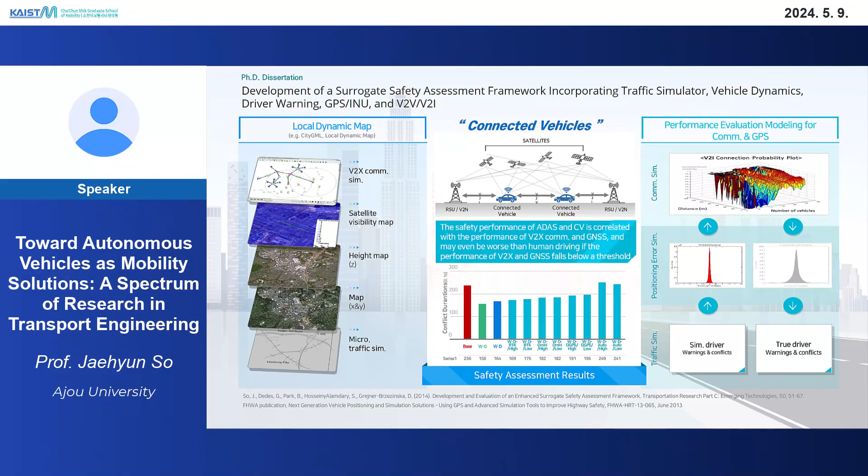But at some point, my research topic is automated vehicles, and another pillar is the smart city thing. It's a pretty different thing, more like urban planning. But there's a reason. During my period at the Korea Transport Institute, most of my job was automated vehicles. But at some point, the Korean government decided let's go for a smart city project. But at the time, is there anyone with a major in smart city engineering in their bachelor's degree? Probably not, right?

So there were no actual experts, no PhDs in smart city engineering. So at the time, they collected some people, and in Korea the main solution and advertisement was automated vehicle, automated bus, automated shuttle. So they collected some people from automated vehicles, and I was one of them. I got an opportunity to design automated shuttle planning and operation, and at some point I was appointed as a planner for mobility services in this area. That's the reason why I entered this area.

At the time, I was challenged because I didn't have any urban planning knowledge. So I had to learn about that, which is super different from automated vehicle technology. But anyway, at some point that was a really great approach, because urban planning for smart city, automated shuttle, that's a pretty different thing.

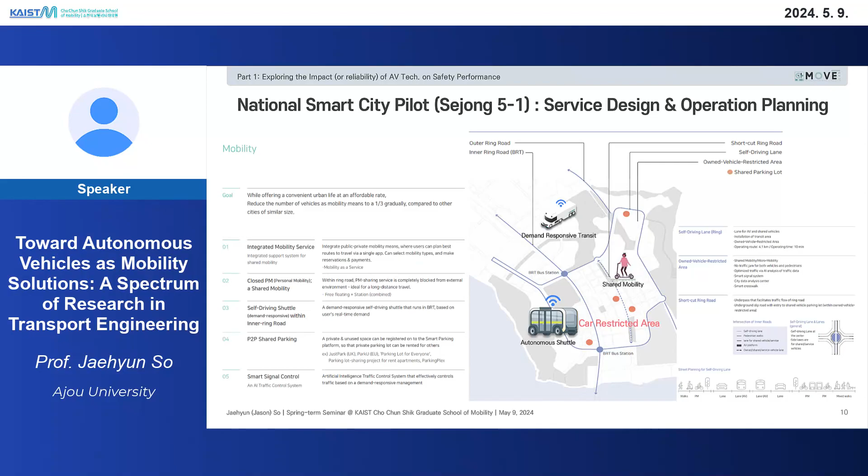So now, my research goal and career, I have to confess I don't think I'm very deep in some specific topic or methodology. Maybe AI? Yeah, I'm using AI. And NLP? I'm using NLP. But I don't think I'm very deep as those kinds of data scientists, and I don't want to be actually. I just want to use it very well. So sometimes I think about how PhDs and professors want to pretend and become like a super expert on a specific topic, right? But I thought my passion in my mind is somewhat different. I'm interested in many areas and many topics.

Sometimes UAM, sometimes automated vehicles, and talking with, let's say, Ruben or others - wow, that's a great idea, let's go for it. That's my instinct. So this kind of decision is like, let's just pursue my passion in my mind, not just pretending I'm a good scholar and a very insightful scholar in some specific topic. Instead, I'm going toward the merit of breadth over depth. Depth is important, and I respect that, but my goal is something like that.

So I'm going to do everything for designing and making efficiency optimization of mobility operations. It's like everything about automated vehicles and mobility operation, but that is my approach. So now I'm doing automated vehicles, a smart city project, and UAM vertiport things. I'm happy with that because having new things and new knowledge is my kind of happiness. So that's my career in my research journey.

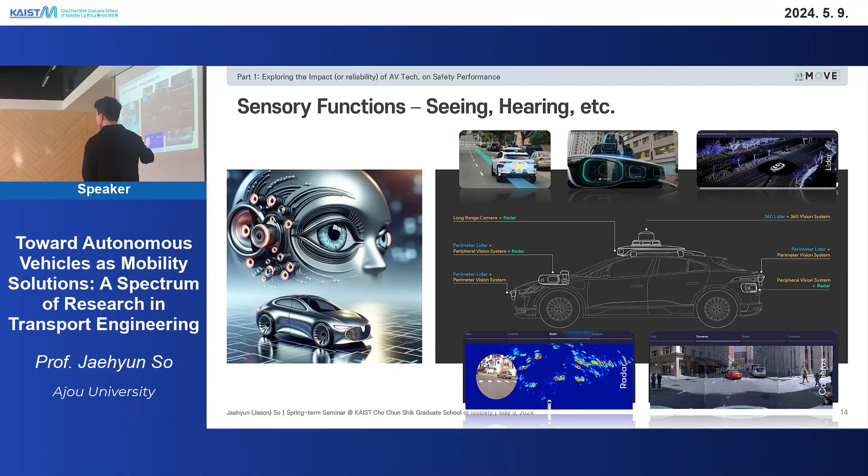So if their eyes and ears are broken, the safety performance is broken. But in transport engineering, I think our problem is we don't think about the ears and eyes having problems, because we don't have the knowledge or the capability. So for those kinds of things, we have to make a naive assumption: that there are no errors on GPS or communication or something like that.

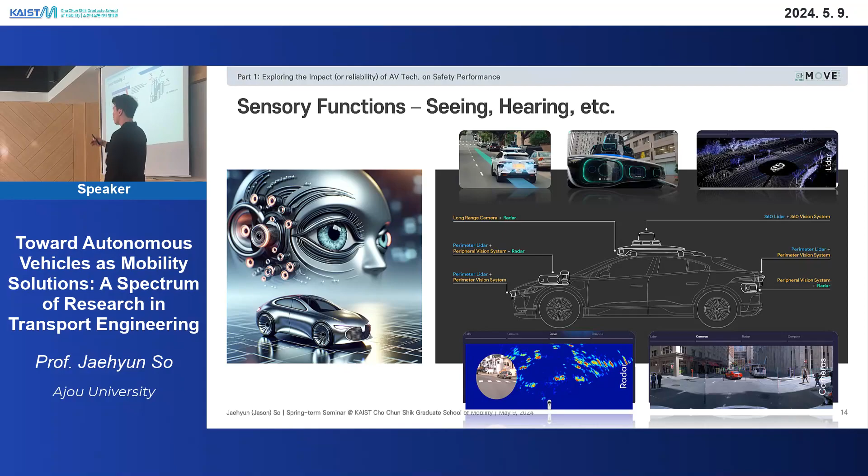But if you see this, there is a lot of GPS technology—GNSS, DGPS, SBAS, PPP, OmniStar. There are actually many positioning systems, but they have different accuracy levels.

But what about in-vehicle? Maybe RTK—K is missing, sorry about that. What about RTK? RTK has centimeter accuracy, so probably having that in a vehicle would be a great idea. But think about it—RTK is like $10,000. Will you have that kind of vehicle with $10,000 of RTK?

And what about GNSS, with 10-meter accuracy? Now you are really in danger, but your system will say, 'hey, you are kind of far distant, 10 meters away, so don't do anything.' You're going to be in danger, right?

So what is actually the optimal technology, and what is its impact on safety performance? That was kind of my research area, my research interest—and at some point there are even GPS errors, especially at the city level.

Have you driven in a very dense area in Seoul City? Then navigation says you are on a different track, or you are kind of out of route, because you are on route, but the system is recognizing your location as somewhat off. So there are many GPS error issues, and they will affect safety performance—they will be really bad for your safety performance.

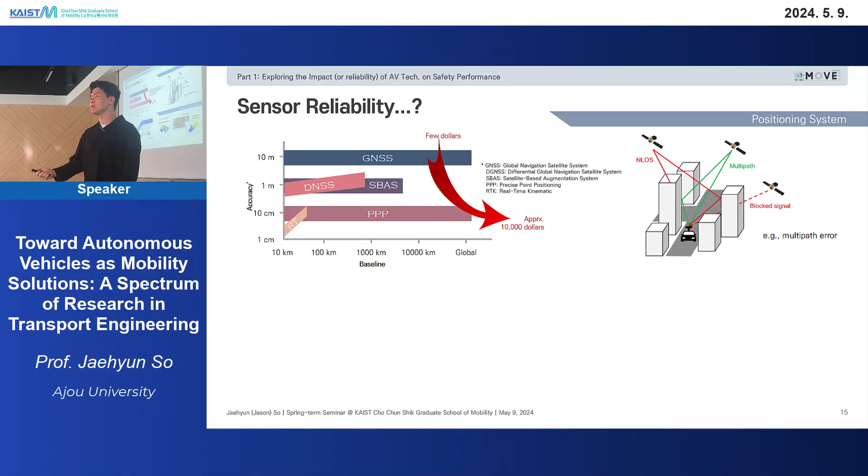And what about wireless communication? Well, WAVE technology in Korea is 27 megabits per second, and 5G is 10 gigabits per second or even 100 gigabits per second. But anyway, there's a communication delay—even though 5G data rate is super fast, there is still a communication delay, even with 4G LTE or 5G V2X.

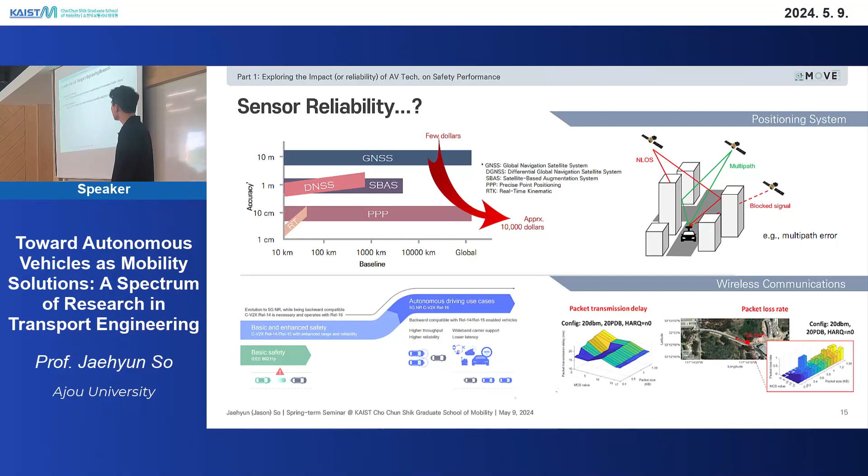Then we have to think about the ears and eyes performance, like GPS accuracy and communication errors. So in transport engineering, we say our automated driving approach assumes there are no positioning errors or communication delays, but relying on those assumptions is, I would say, naive.

Some years before, we transport engineers just did our own things, and mechanical engineers dealt with the GPS device or communication itself.

But now, this is actually my path to my research. I would say even though we are in civil engineering or transport engineering, we have to think about device performance as well, because automated vehicles and automated driving are based on that device performance. So this area is obvious, and this is some kind of integrated area—that's my path for my research.

So this was like a simple result.

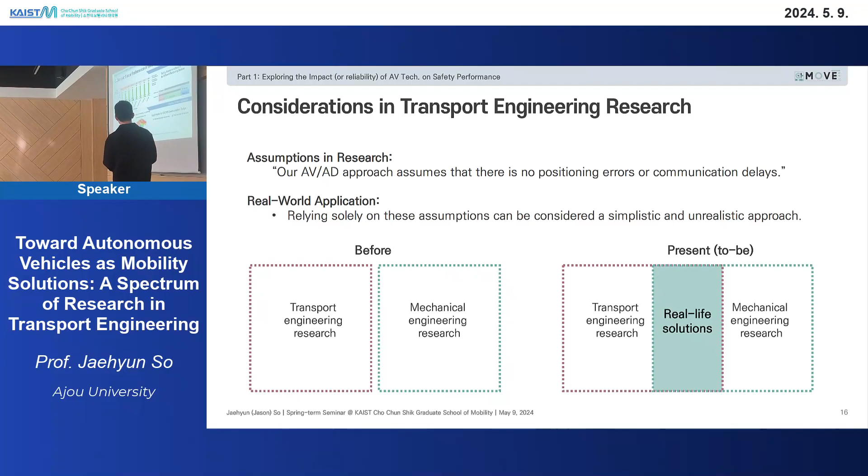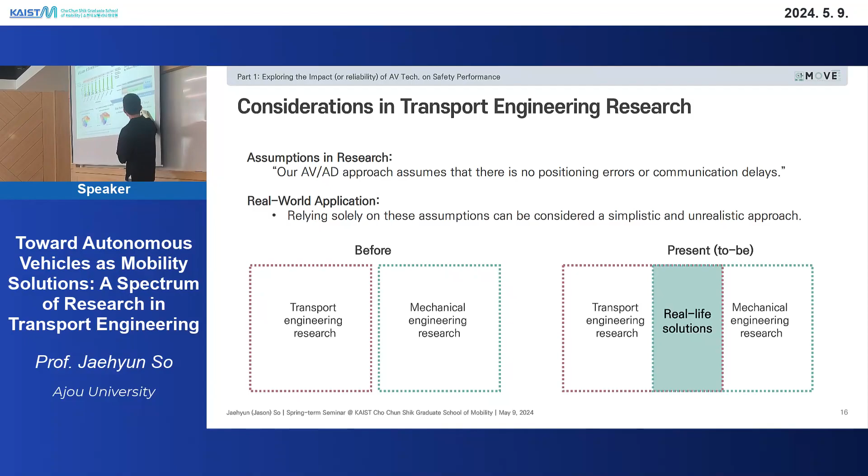I tested the communication delays with the distance between transceivers, like the distance between vehicles, and the total number of vehicles. Think about that. There are transceivers, like you probably use KT, SKT, or LG Plus, there's some kind of transmitter, and so many people inside the transmit cell, so there could be some kind of delay. And what about the distance? Like 1 kilometer from the transceiver, communication performance goes down.

And then there's GPS tech. Actually, RTK is a super accurate and autonomous GPS. That's different from just a GPS in your smartphone, which has 10-meter accuracy, the positioning error.

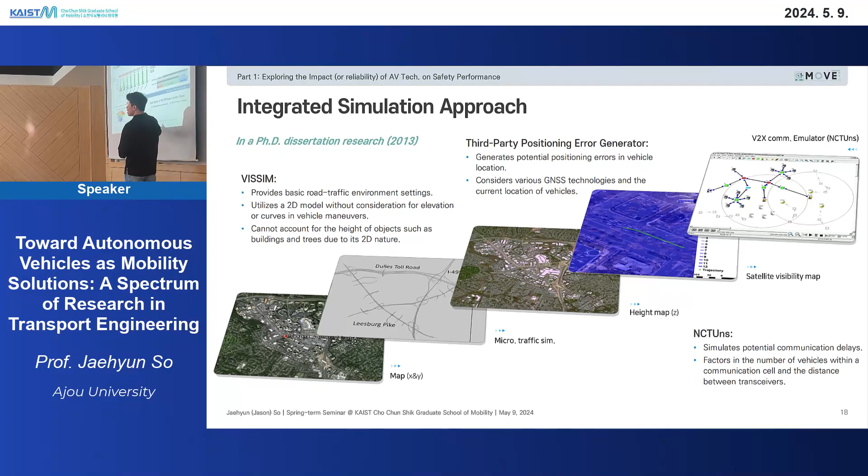So based on the result, instead of doing a fully integrated approach, we decided to use this kind of model, where communication delays were calculated separately. Based on this integrated approach, I concluded with this figure.

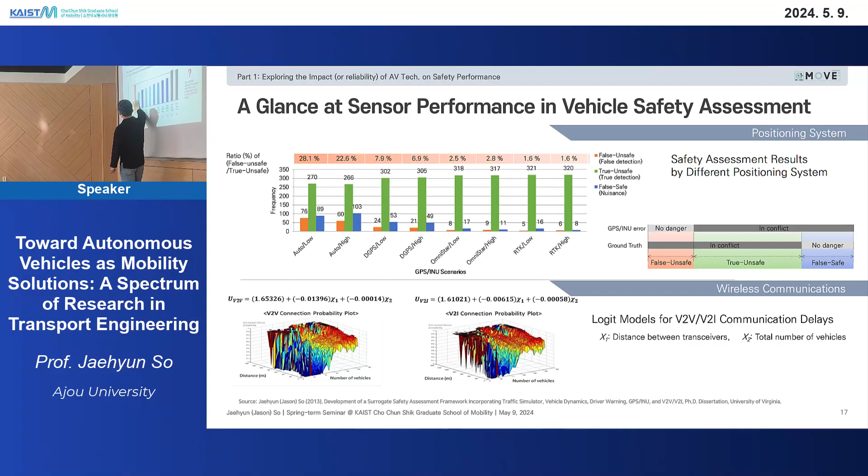So at the time, FHWA, the Federal Highway Administration, was wondering about this - this option is bad but cheap, that one is really good but super expensive. So what would be a great level for commercial vehicles? What about OmniStar GPS, or DGPS, or something like that? For safety, because lives matter, that's not good enough. RTK is super good - maybe in the future we can apply that, but it's not commercial level yet because it's too expensive. So they wanted to explore the impact of accuracy on safety performance, and that was one good result to show.

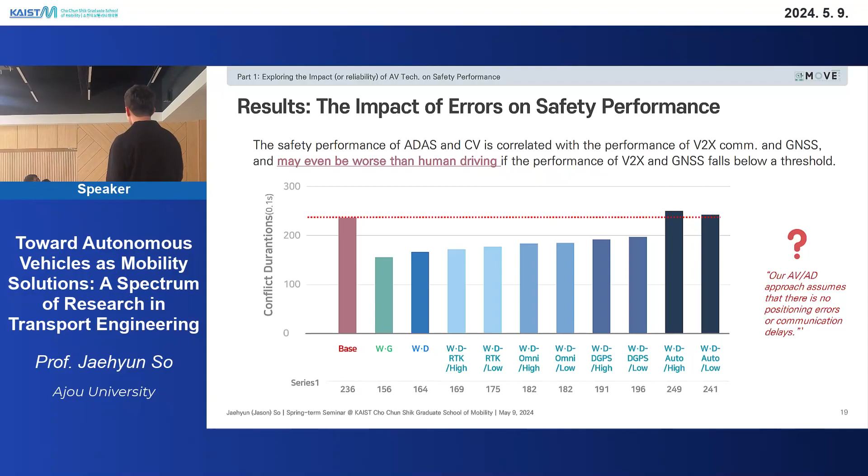That was the first thing, to do some automated vehicle research from transport engineers. Second thing is, some of you probably have the project about automated vehicles to create evaluation scenarios, because automated vehicles have to be tested, right? But the scenario making is like from transport engineering, where we just investigate in which condition or situation humans make mistakes many times or maybe are in danger. So that's kind of a simple way.

But I would say, well, traffic accident data has so many elements, like 30 or 40 elements, about numbering. Like, how can I say, sunny days is a 0, or rainy is a 1, and date time is a number. So everything is actually a number. Place, 대전, let's say 399 or something like that. Everything is a number.

But there's only one column to describe how the accident happens. It's like a police officer saying, number 1 vehicle was approaching the entrance of an apartment, and second, the pedestrian was approaching or something, and then the first vehicle didn't see any kind of signal, and they were in conflict anyway, or something like that. It's more descriptive, but this is more like just a fact.

Well, if an accident happens on a rainy day, can you assume, can you make it certain that the accident cause is because of rain? Can you say that? Maybe on a rainy day, I just made another mistake. It's rain, the rain just comes and that doesn't matter. So we can make a misunderstanding from these kinds of things because it's rainy and so the pavement is not right, so accidents happen. That's our understanding. But in fact, actually there's no, because if you read these kinds of descriptions, it's just human mistake. It's like I didn't see the green signal or red signal or something like that.

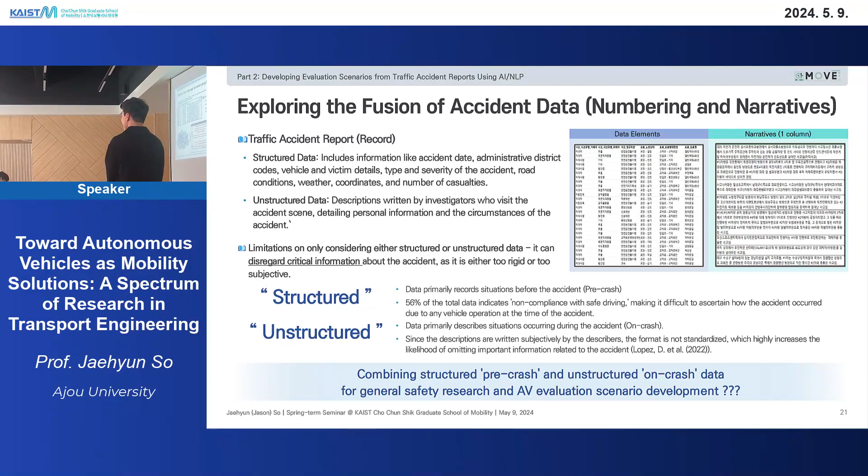So actually, the first attempt was made in 2016 and '17. At the time, I went back to Korea, and I thought I was kind of aggressive in my research, so I wasn't going to do the normal approach, and I was going to do a kind of fantastic approach because I went back to Korea. I had a lot of passion.

So at the time, I used the TF-IDF methodology, and if you're studying NLP, this is like a former model before the transformer or well, XGBoost things. So at that time, I analyzed these things using this methodology, just to find out what kind of wordings would be frequently observed, rainy or maybe a left turn. So just connecting by frequent wordings and making an evaluation scenario, that was the first approach to apply NLP.

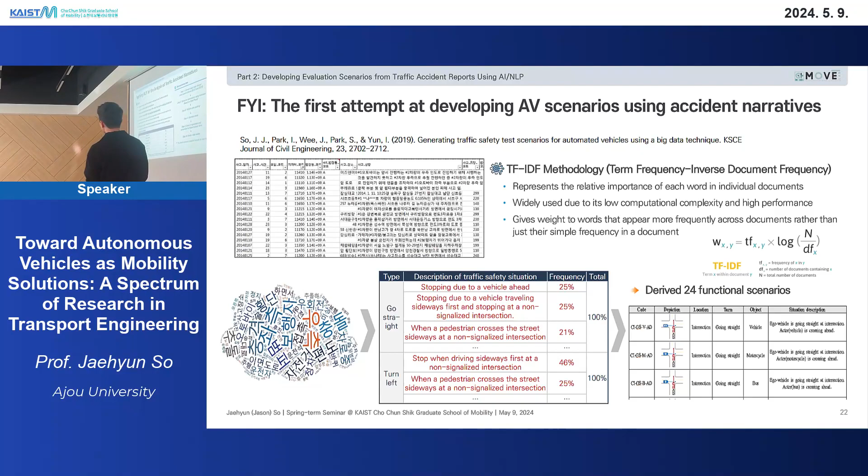But now I'm going more deep because we have a great NLP model now. It's like a transformer. The attention mechanism was fantastic. I'm not going to talk about that, this isn't really a theoretical lecture, so I'm not going to talk about the attention mechanism and transformer and BERT. But anyway, transformer and BERT are pre-trained models for language. It's a really great advantage. So now we actually use the BERT model to interpret the structured data and unstructured data.

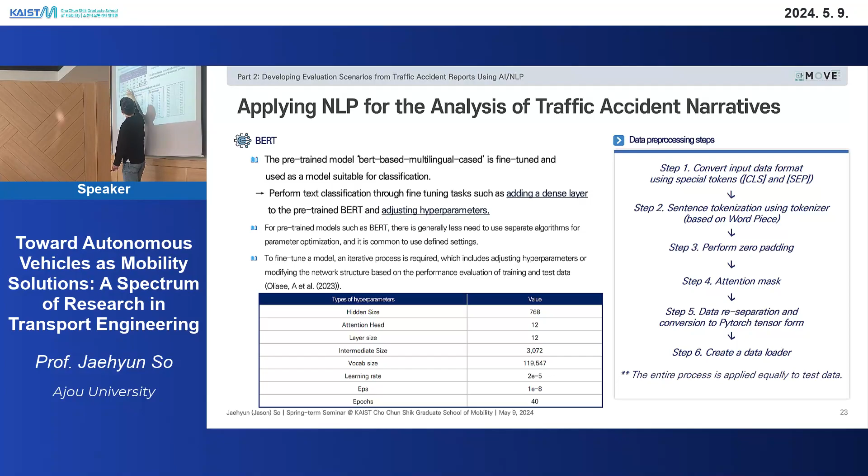Our next step is developing evaluation scenarios by integrating structured and unstructured data. So that's our next step. Okay, what will be next? What other parts should we do with automated vehicles from a transport engineering perspective?

I will be very brief about this.

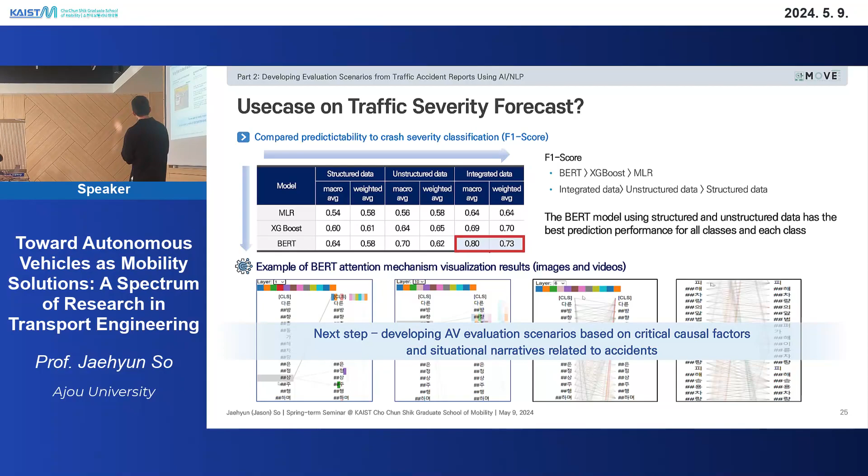There was an interesting news story: cops pulled over a Google car because it was too slow. Automated shuttles and vehicles now are just super slow and keep braking to prevent any kind of danger. That's understandable, but that's not mobility — I wouldn't use that for commuting, a business trip, or a family trip. That's not a mobility solution, just a technology.

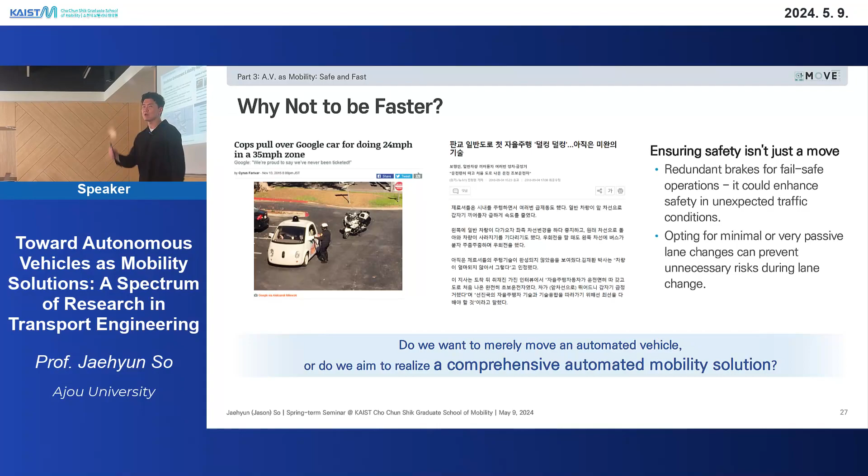So I wanted to find a combination that keeps safety but also makes it faster. But I needed a use case. If I said I'll just make passenger automated vehicles faster and safer than others, people would ask why that shuttle has to be faster than others — it's not normal. So I brought in applications like emergency vehicles — ambulances or police cars. Police cars and ambulances have to be fast, but still keep safety. So I simulated this in VISSIM using EIDM.

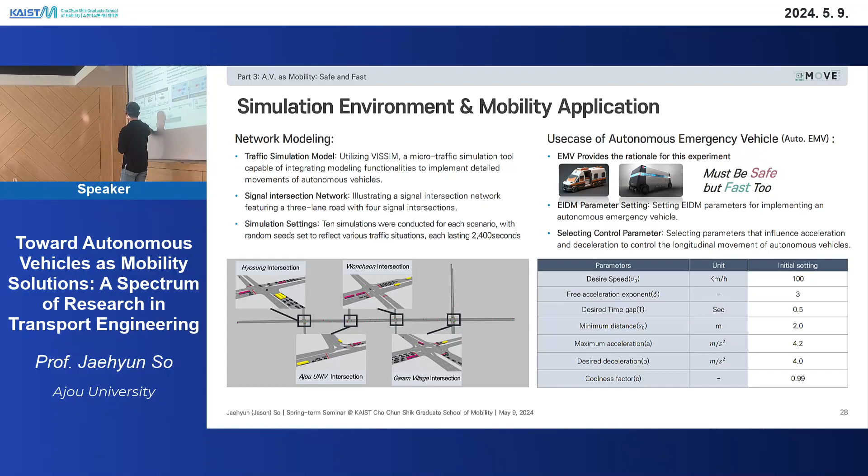Some of you are probably doing this kind of research. In the EIDM model there are many parameters: desired time gap, maximum acceleration, desired deceleration, and others. I also had to define lane change behavior — sometimes aggressive, sometimes non-aggressive.

I defined lane change behavior based on people's logic: when they decide to change lanes, they think about benefit first — is it advantageous for myself? That's the first decision. If it's beneficial, then the second consideration is possibility — is it possible? So I built this logic for defining driving aggressiveness for the AV.

There are many parameters, so the scenarios were combinations of parameters — 216 sets, 16 sets, totaling about 3,456 scenarios. There was a lot of simulation redundancy. Our measures were the number of traffic conflicts and travel time saving.

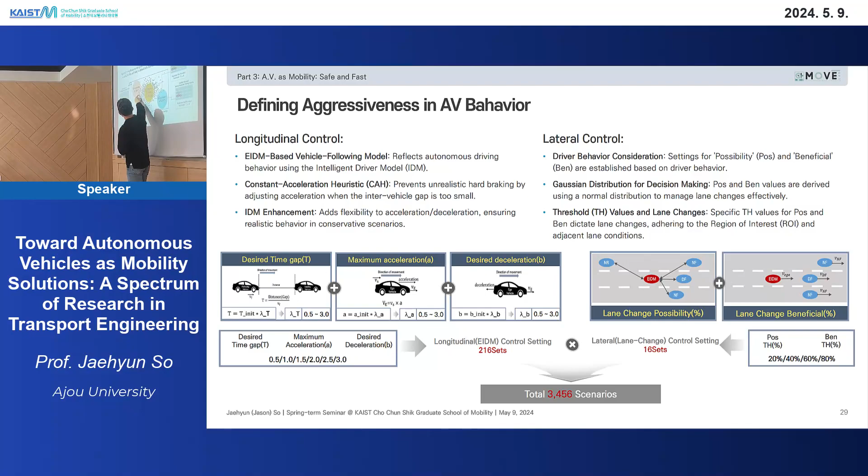If the parameter combination results land in one area, it's just for safety, like an automated shuttle now. In another area it's fast but safety is bad — not a great solution. So I wanted to find the combination of parameters and their ranges that balance safety and mobility.

Based on this research, we found ranges of driving parameter sets that satisfy not only safety but also mobility. That was one touch-point aspect from transport engineering toward automated vehicles — how to categorize areas like mobility-focused or balanced. We just used k-means clustering.

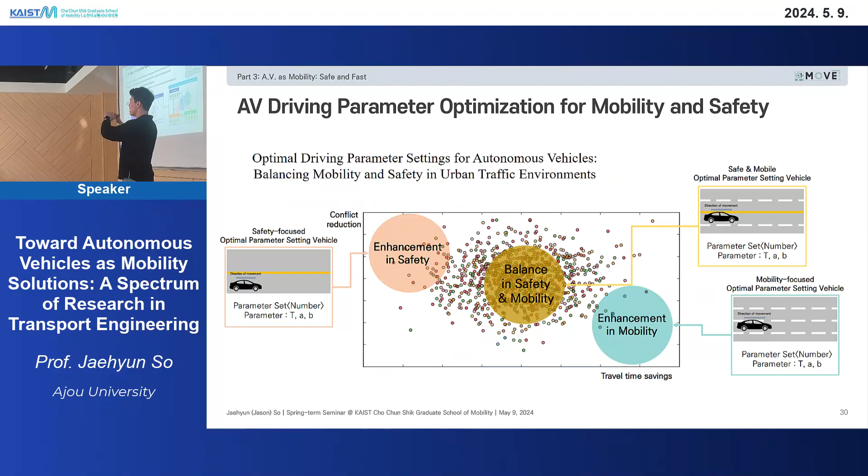You probably know what k-means clustering is, so I won't go into detail. We used it to classify the area for safety-focused versus a more balanced area. That was our approach, and I made a paper about it for IEEE.

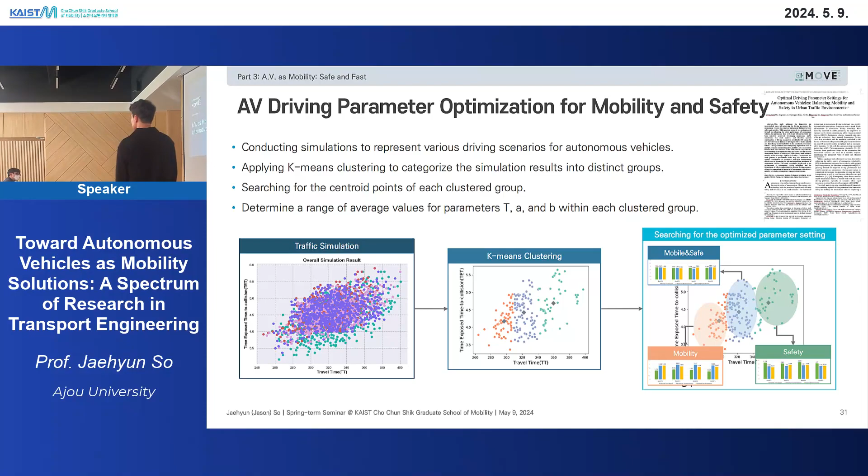Think about LiDAR, radar, camera image, and GPS positioning. There's so much data being produced from automated vehicles. It's like automated vehicles have great eyes and ears, so they are hearing and seeing. So many data are collected. So why don't we use that collected data from automated vehicles as a kind of sensor?

We co-worked with Dr. Hyung Kim from, I'm not sure about the English name, 차세대 융합기술원 in Gyeonggi province. Hyung Kim got a PhD here, under Professor Kitae Jang, one of the first or second PhDs from him. But we have a very close relationship.

So this Zero Shuttle is collecting so much data, like LiDAR sensor data, radar sensor data, and so on. We decided to find out some unfamiliar situations in the road traffic environment for automated vehicles based on the sensor data.

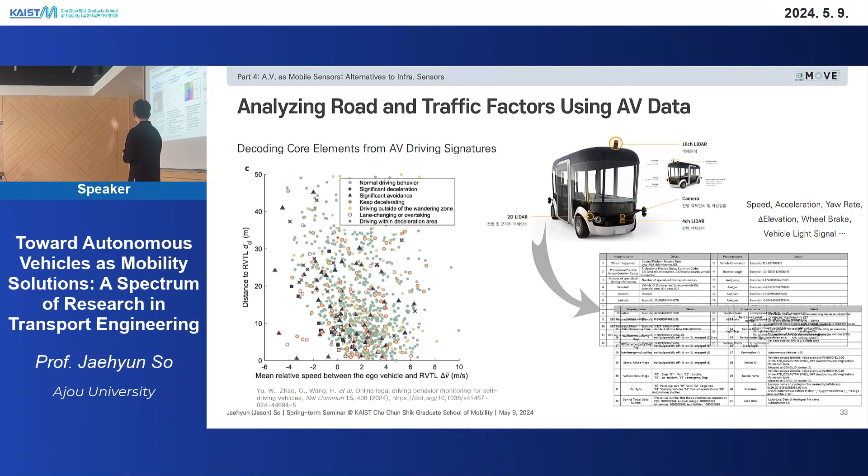Based on the Zero Shuttle data, we categorized driving behavior patterns and data patterns. There are 6 different categories in terms of driving behavior or data signature, and we investigated each area to see what happened there.

So the Zero Shuttle data was somewhat different in some areas. We investigated what happened there. Some of the areas just had different behavior because of left turns, right turns, or sometimes stopping — normal behavior, within the range of normal.

But some of the areas were kind of abnormal, and when we investigated, we found that the road traffic environment was not that great for automated vehicles, at least. So that is a way of searching for dangerous or disadvantageous situations for automated vehicles. That was our idea.

So this is just the entire framework: hybrid SOM k-means and then k-means plus plus. It's all about the classification model. I'm not going to talk about each model itself.

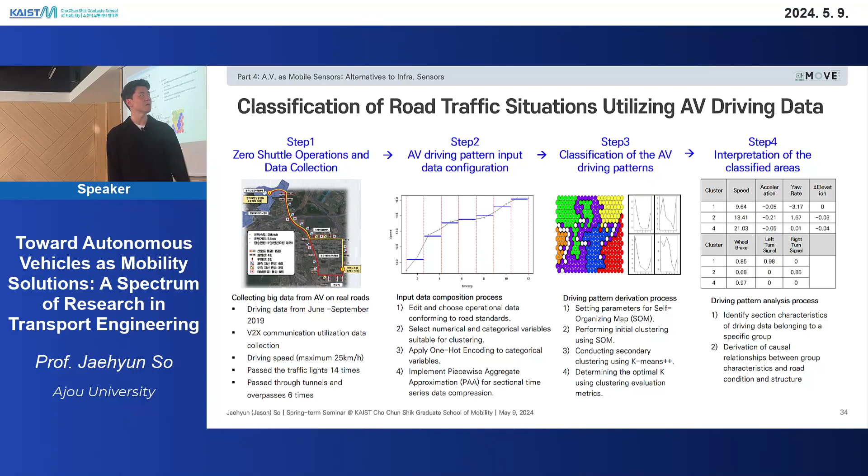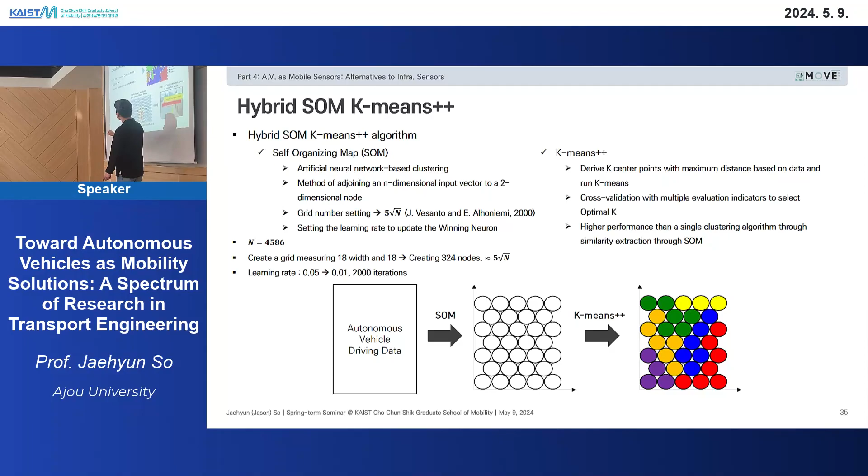But anyway, using k-means with the data signature and driving behavior patterns, we collected that data and classified it based on a hybrid SOM k-means clustering approach. We got 6 categories and investigated each one — let's say 1, 3, 4, 5.

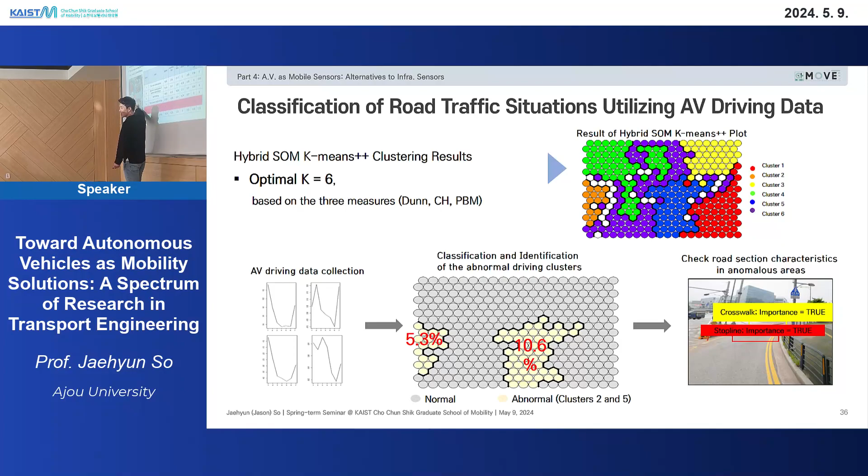For example, cluster 5 was like this: the automated shuttle is driving in the rightmost lane, and has to turn left, requiring multiple lane changes. At that time, the data signature shows too many accelerations and even stopping on the road — stopping is actually prohibited, but the automated shuttle did it. Then some emergency light came on, so it was a somewhat weird situation.

So we concluded this area is not that great for automated shuttles because it requires many lane changes. Maybe we should design some kind of dedicated left-turning lanes or something like that. We're still finding insights and improvements from these results, but that's only one part.

The good thing about this approach is that we used automated vehicle data as a kind of infrastructure sensor, to investigate which road segments were great or bad for the automated shuttle. That's another approach, and you guys can do a lot of things based on sensor data, because it's huge. We're still searching for what kind of research we can do as transport engineers using that sensor data.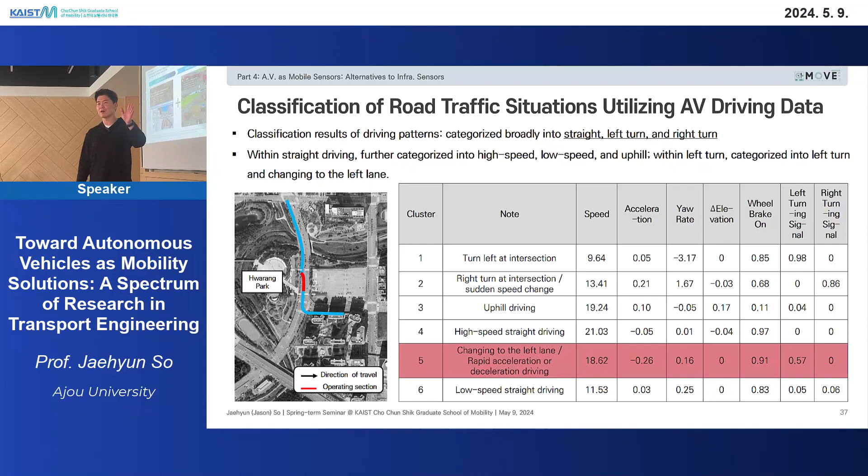So I decided to integrate these approaches. I produced the vehicle trajectory out of the traffic scenarios and post-processed it with the vehicle dynamic simulation. That was one idea. Maybe if I get another chance to share this in a seminar, I'll talk about it in detail.

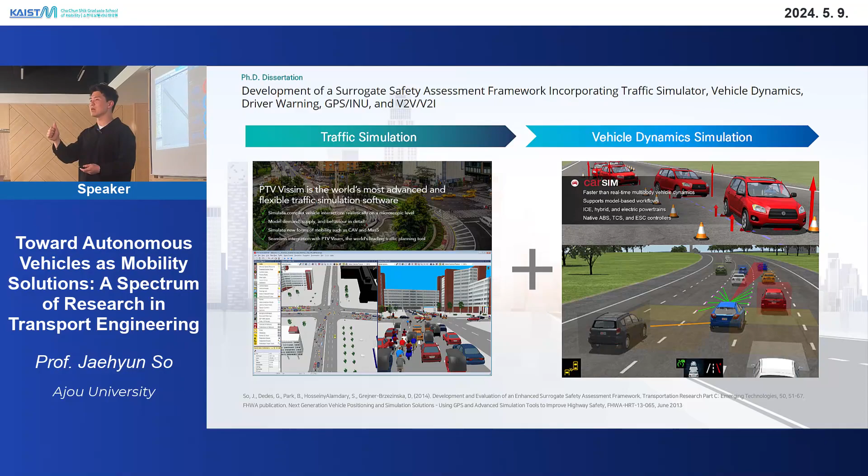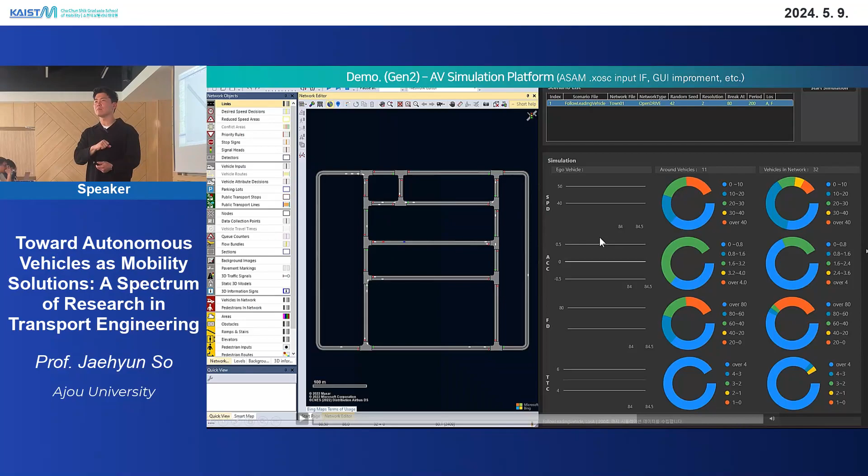So now in our lab we are making this kind of traffic simulation interface as well, because one message is: we are engineers, and can I say researchers, but sometimes we can make our algorithm better, like solutions. Our lab wants to make all the algorithms into solutions for commercial use, so we always make these kinds of interfaces, please, maybe in collaboration with other companies, making it a solution, not just an algorithm.

Because at the business level, if they see your algorithm, they will say this is just a combination of some numbers, not at a practical level. But if you put some effort into it, you can make it like a solution. Then at the business level they will say, wow, your solution is kind of ready, we just put some effort and it's going to be great. So you can approach them for business.

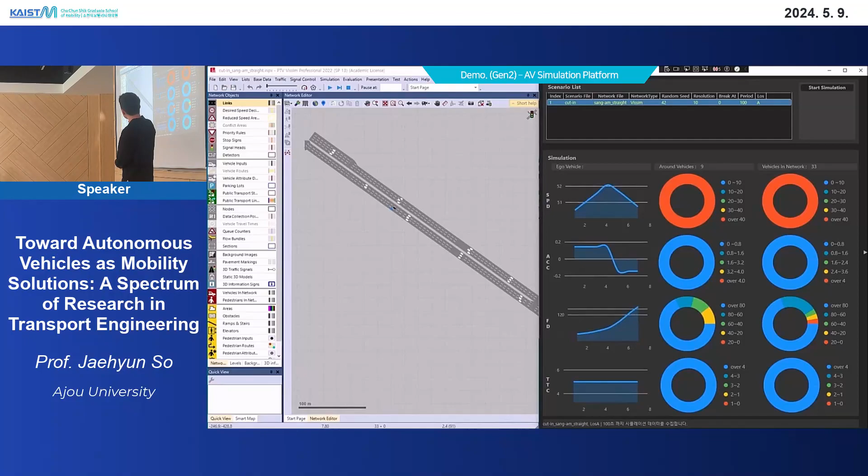That's the reason why we made this kind of simulation framework. This is a simulated evaluation framework for automated vehicles, a kind of real-time performance check interface for automated vehicles. I'm not going to go into detail.

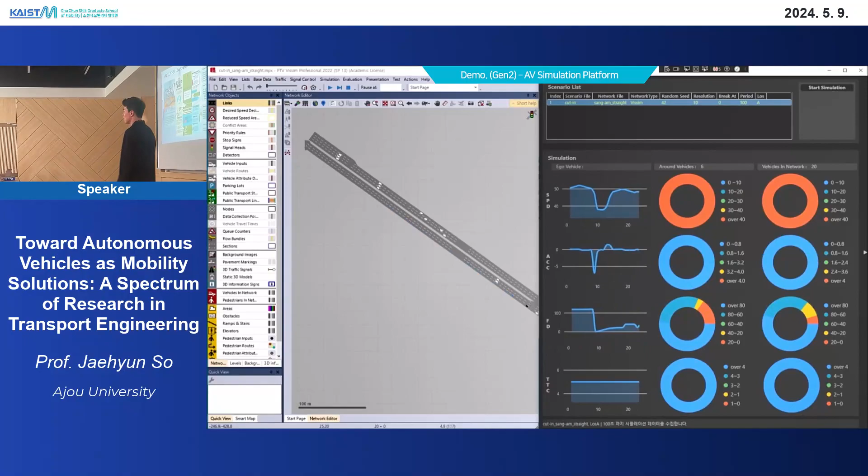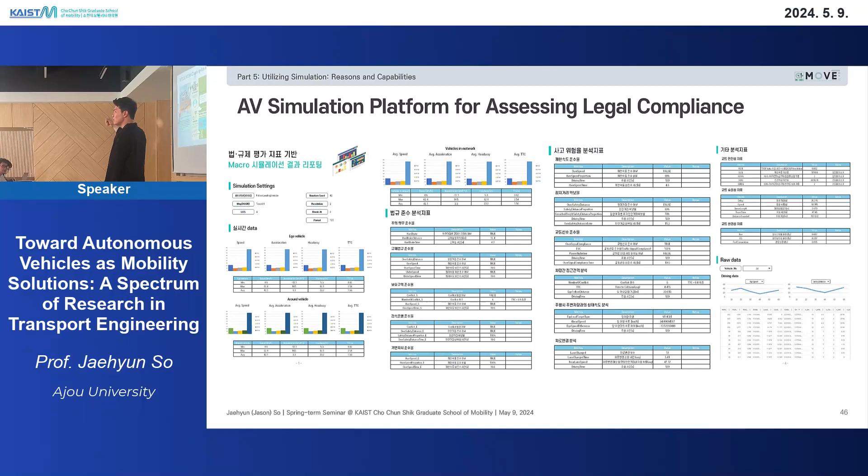So I just want to conclude my presentation with this one thing. There's one research area in transport engineering like human behavior, right? Many professors are doing human behavior research. But what I'm interested in is not human behavior, I'm interested in automated vehicle behavior. So I'm kind of checking the wellness of automated vehicles.

This is like the wellness checkup process for humans. Using that analogy, we have to have a capability to examine the ears and eyes of automated vehicles, which are sensors. Not just making an assumption that there's no error, instead let's make some kind of approach and method to evaluate the eyes and ears performance. That's one approach.

And second, please ask the automated vehicle: does something bother you? What kind of road traffic situation bothers you? Then you listen to their voice. Maybe there's no voice, but you have to make an approach for how to identify that situation and who is bothering the automated shuttle.

And then you have to make evaluation scenarios as well, because if you want to check the performance of an automated vehicle's algorithm, you need a checkup process with evaluation scenarios. Immunization is important too. So, in what situations can AVs be resistant to challenging situations and operate sustainably? To identify that, you need methodology.

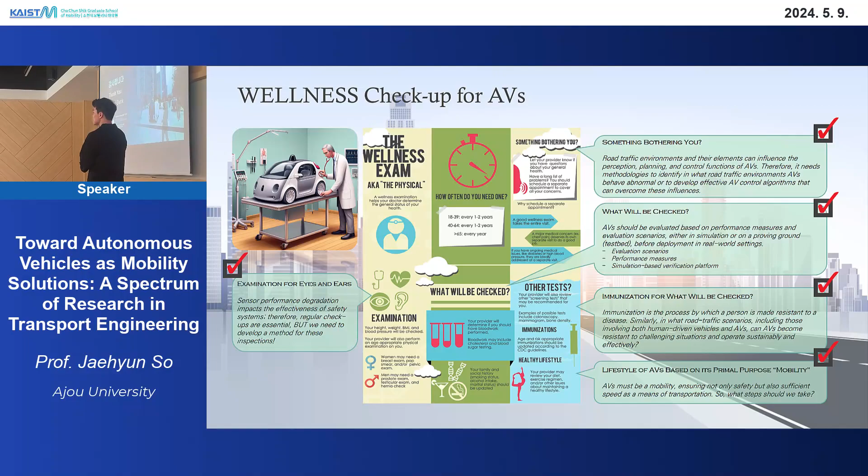I have limited time so I went kind of fast. I'm going to conclude my presentation here. If you have any questions or comments even after this presentation, please contact me, I'm ready to collaborate with you guys on any topic. I'm already close to working with this graduate school, so I'm around, let's keep the discussion going.